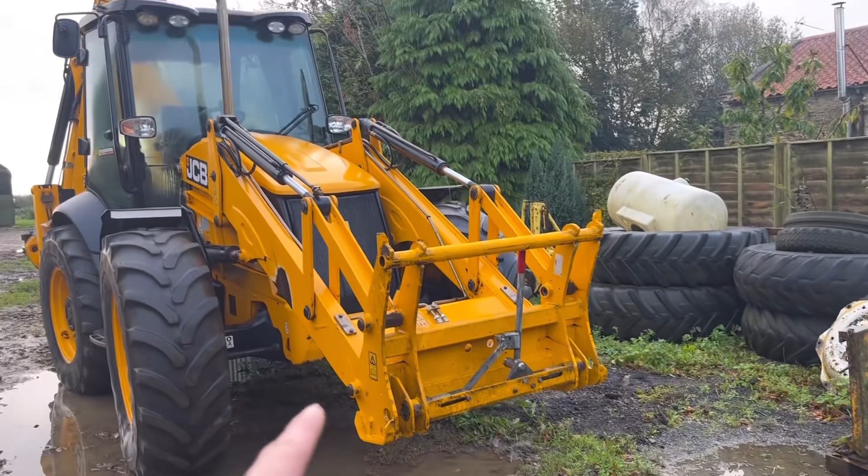So we've got this JCB 4CX in. When this came in, the bucket was fitted straight onto the machine via the pins. The customer's bought a headstock for it, a quick release headstock, so we've changed that over. Now you can change implements on the front, but the bucket obviously won't fit because that was designed to be pinned straight onto the front. So what I've got to do is chop these off, profile some brackets out, and then weld some brackets on so that will fit onto there.

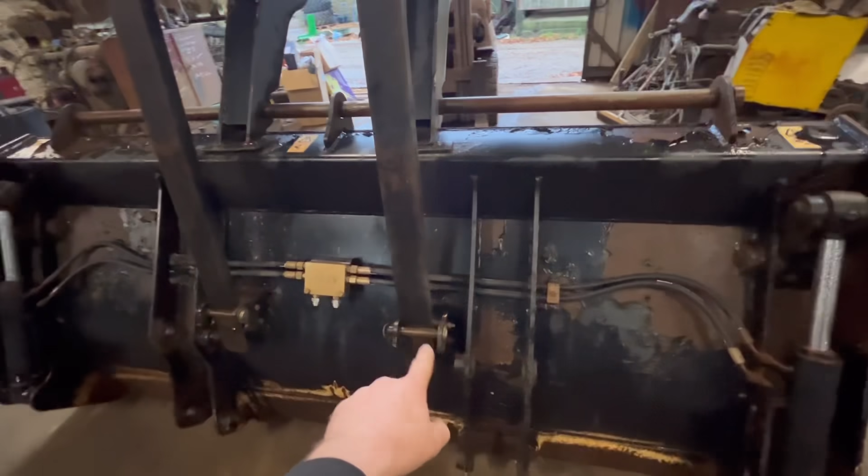I think the first job I'll do is take these tines off completely because I need them like brackets off to be able to get in there. If I fold the tines over and try to move the bucket about, they're going to be flopping about. So if I just take them off completely, there's only a pin to take out, get rid of them, and then there's these pipes to take off, and then I'll blank them off, blank the pipes off and blank the rams off.

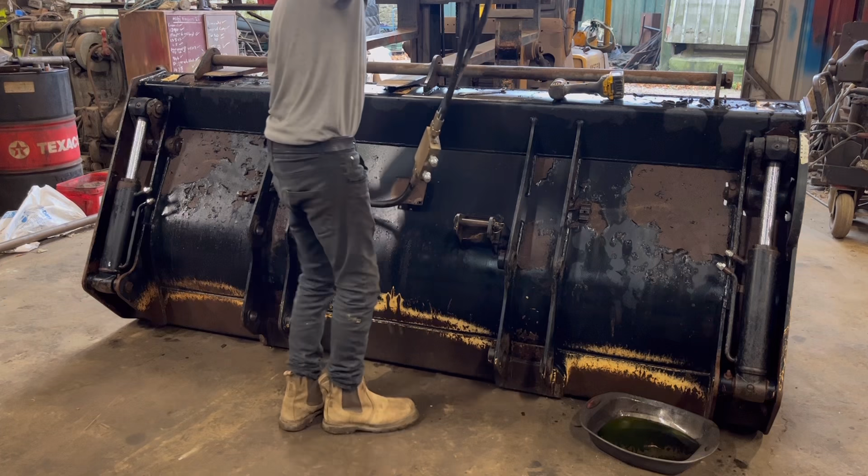So that's both the tines off, taken all the pipework off. I've covered the rams with welding tip dip so that should protect them. I put that bar back in because it's handy to lift it about with. So now I've done all that, I can start chopping one of these off.

I'm just going to take one off to start with, and then I'll work out the geometry for my brackets - work out the curve for the bracket, work out the geometry so that it still has the same amount of tip and crowd as what it did originally. Once I've got that worked out, then I'll cut the other three off.

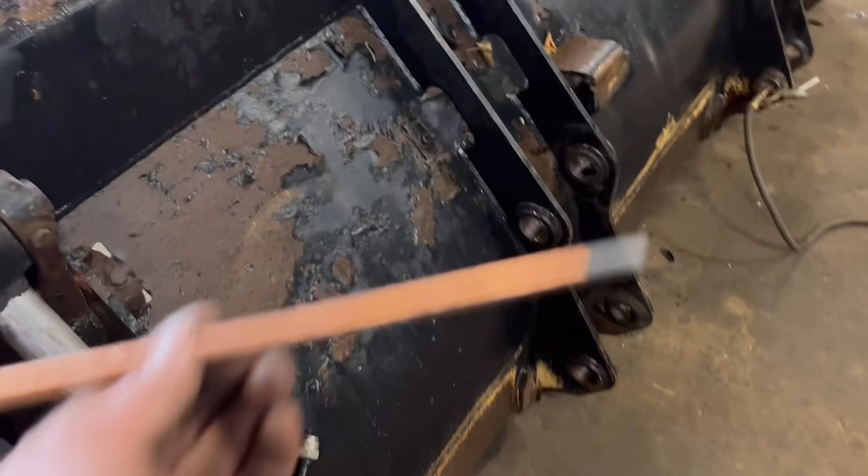So I'm going to gouge down the welds, I think, would be the best way to get them off with the arcair gouger, and we're going to use 8mm rods. I'll try to be as accurate as I can and not dig into the face material, just try to blast the weld away. It is quite a skillful job, arcair gouging. It would be easier to just slice down them with the gas and chop them off, but I never think it looks very good if you leave the remains of old brackets on. I always like to take them off completely, put a new bracket on, so you sort of can't tell it's been done.

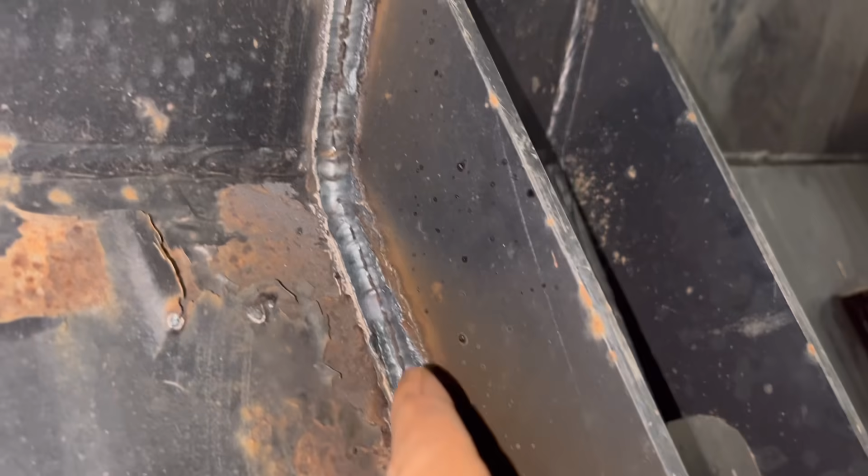Right, so I've gouged down there. You can see the separation line. There's a bit there I've missed. Didn't quite have my eye in to start with, and then when I got down here I sort of got my eye in a bit better.

So hopefully now there's enough weld been melted away, hopefully it'll knock off. There might be a few more bits out. Oh, a bit there I've missed, I've not gone deep enough. I'll give it a smack with the hammer and see what happens.

So that's that off. You can see for the most part I've managed to keep above the base material. Odd spot might have dug in a bit, but it's not too much of a problem. So I'm going to clean that up now, and then I'll use that as a pattern to cut the new bracket out with.

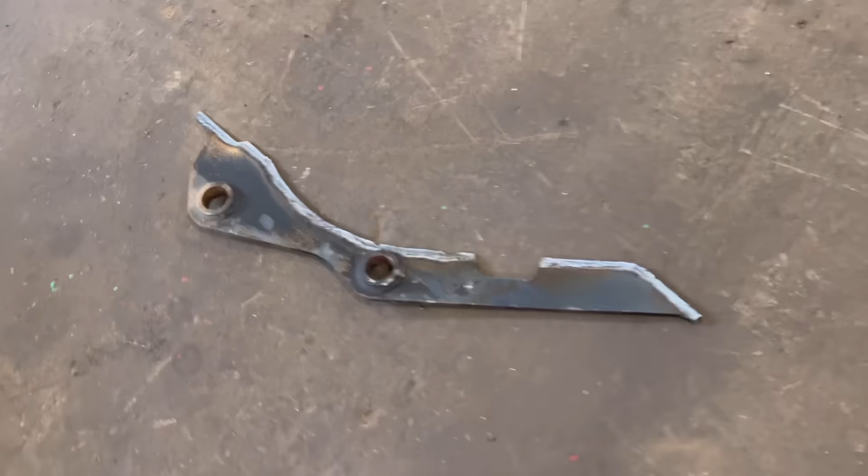Right, so I haven't bothered cleaning that up yet, but what I've done is I've just taken a photo of it, and then I worked out the other day how to import photos into Onshape. So I've put it into Onshape and I've traced around it and then dimensioned it there. So what I'm going to do now is just cut out a bit of 3mm plate - I've got 2mm actually, 2mm plate. Just make sure that is right, and then I can finish drawing the rest of it on once I know that profile of the back of the bucket is right.

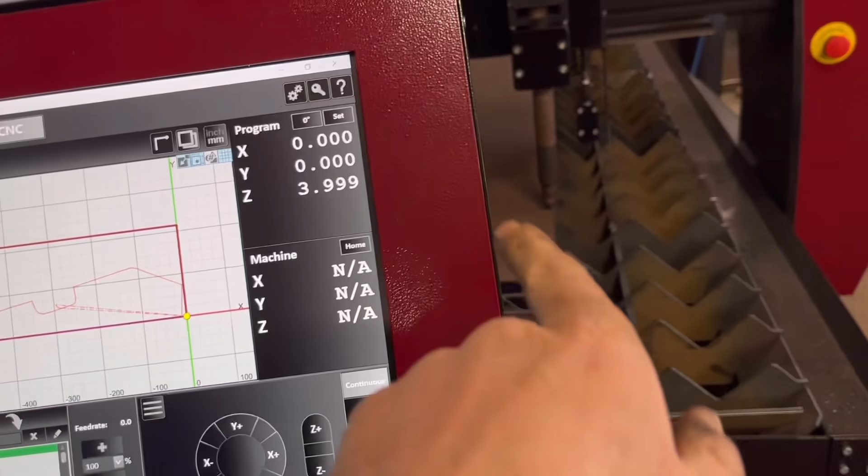Right, so I've got that shape loaded into the CNC program, so that's ready to go, lined up on there. So we'll cut that out now and see where it's going to fit or not.

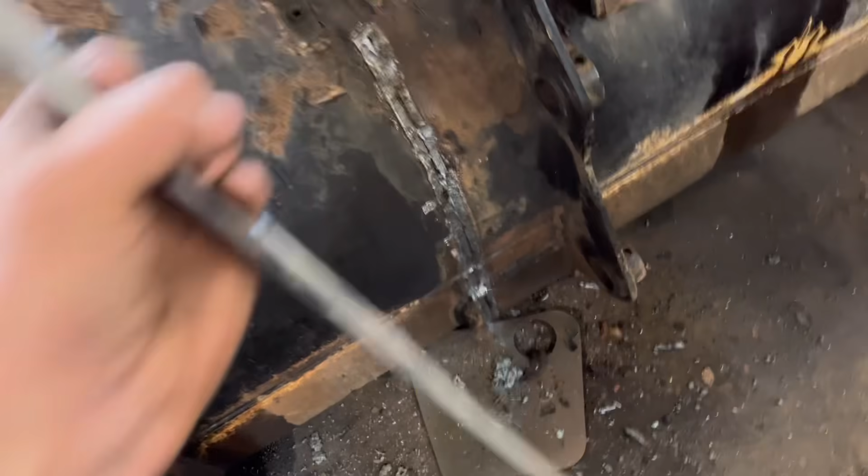And it nearly fits. It's just a bit of a gap around there, you can see. I think it's touching at the top there, so if I grind a bit off that top bit, it should make it fit better around there. Yeah, it fits down there near enough. Just that bit there is a gap.

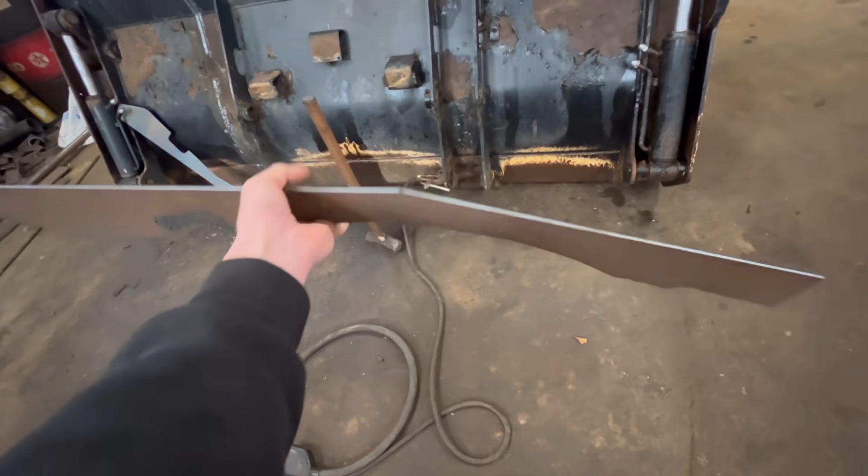Right, so I've cut out another one of them. I did a few alterations. It actually fits one side better than it does the other for some reason. When you put it on this side, it fits nice around there, but then when you put it on here, there's a little bit of a gap in the middle. So I think I'll make that do. That'll do, I can work with that.

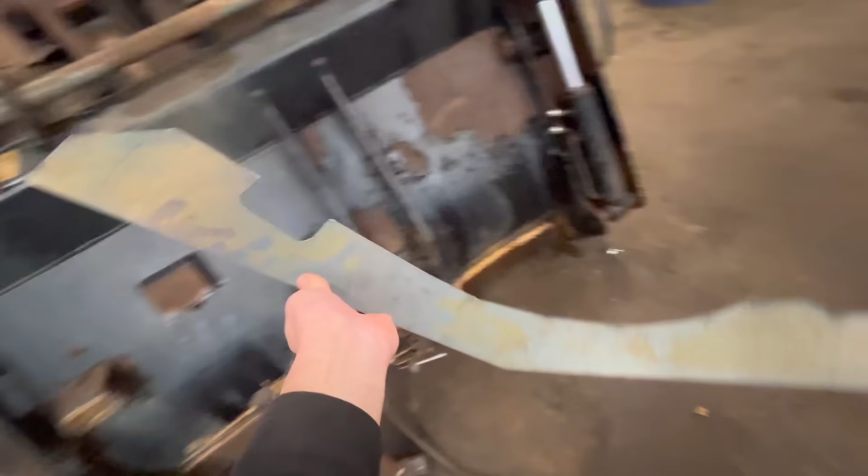So what I need to do now is measure what angle them holes are at now while the bucket's sat on the floor, and set the digger up the same, and then see if there's any difference on the new headstock between where the degree of what the hole centers are.

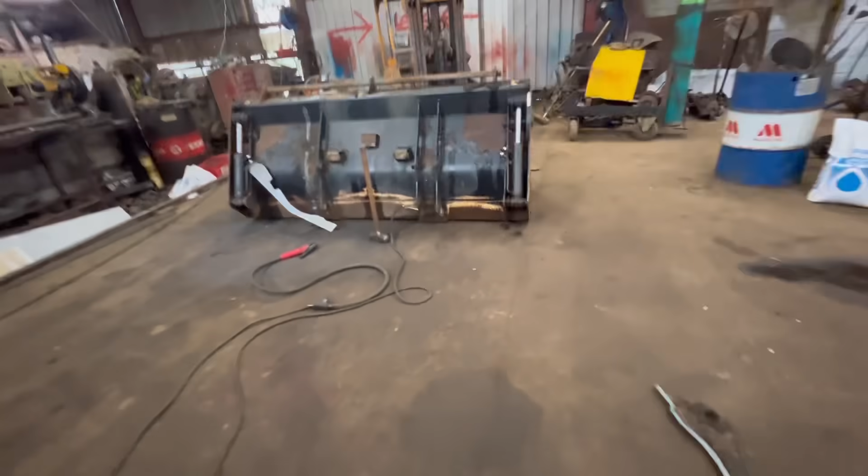What I'll do now is put a straight edge up against the back of them, measure what degrees that is, and then do the same on the digger. Set the pins up at the same degrees as this, and see if the new bottom pin and the top hook is the same. If it's the same, then it'll be straightforward. If it's slightly different, I'll have to put a bit of angle on the brackets, and it's not fussy to a couple of degrees.

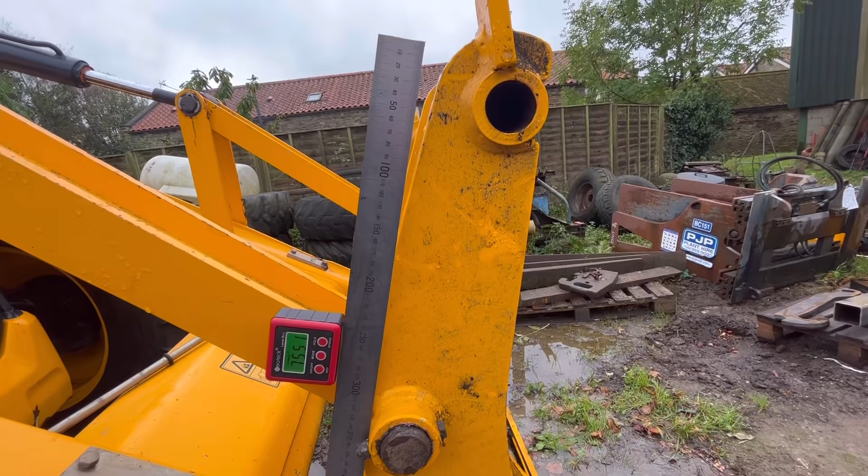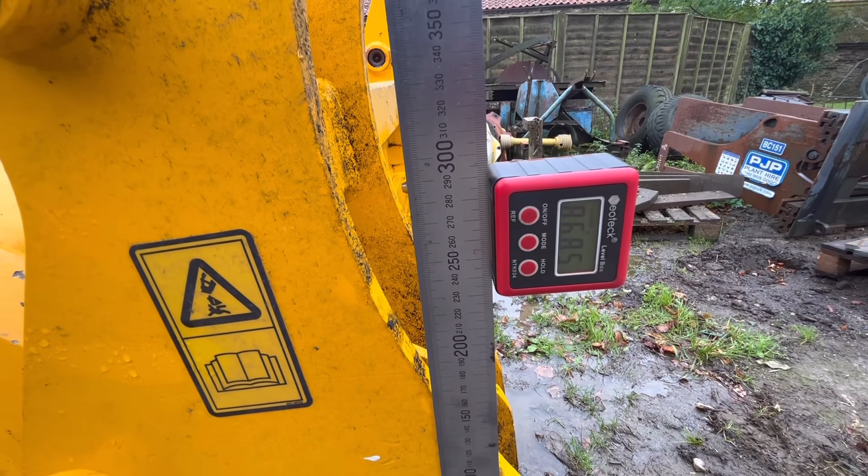You can see that straight edge on there, they are at, we'll call it 76 degrees. So I've got this set up the same, near enough 76 degrees. You can see that top bar and the bottom pin are nearly in line with each other. So when I've got that near enough in the centre of there, and that near enough in the centre of there, that is about 86 degrees. So when I cut my brackets out, when I draw my brackets, they need to be 86 degrees compared to how they are, and then the bucket should have the same geometry.

Right, so there we are. That is what my bracket should look like. I think I am going to just cut one out of 2mm of that plate there again, just to make sure it's right, because 2mm plate is a lot cheaper than 30mm plate.

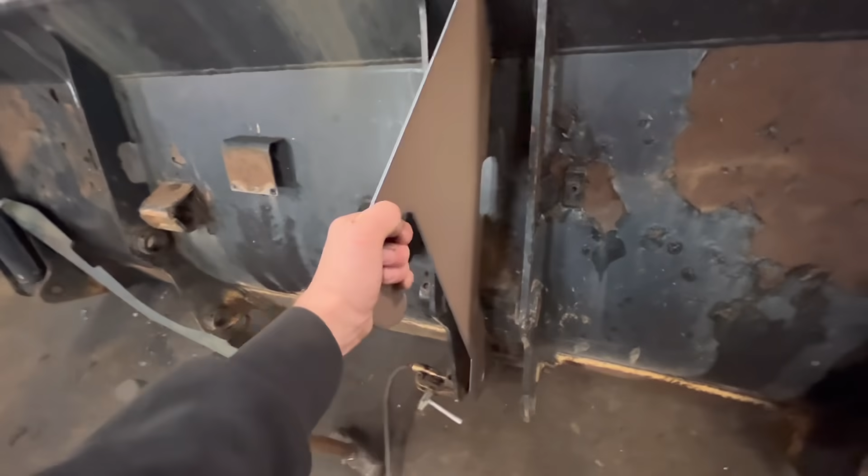So that fits on the back of there, all right. The hole through for the hydraulic pipes. So we'll try it on the machine, make sure the hole centre is right. And if that's right, then we'll finish cutting them off.

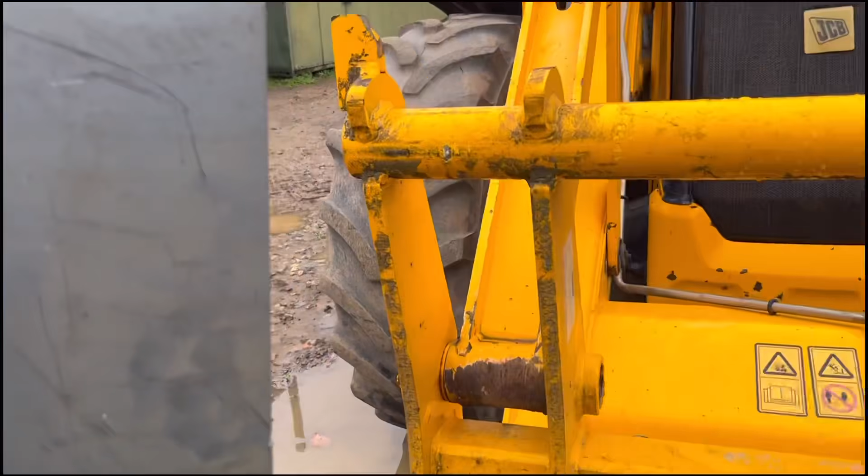Now there will be a stop to weld on here as well. Yeah, that's not right. Oh dear. So I don't know how I've managed to do that, but that is a long way out. So I'll have to check my drawing. It's a good job I did cut it out at 2mm.

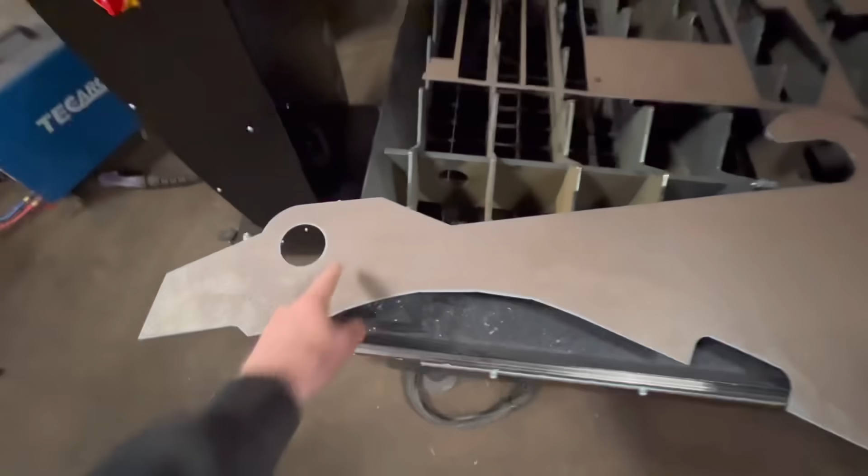That's what I've done wrong now. I did the centre of there to the centre of there at the measurement, rather than it was supposed to be the top of that hole to the centre of there. It's supposed to be 648, and I've done it centres instead, so that's why that doesn't fit.

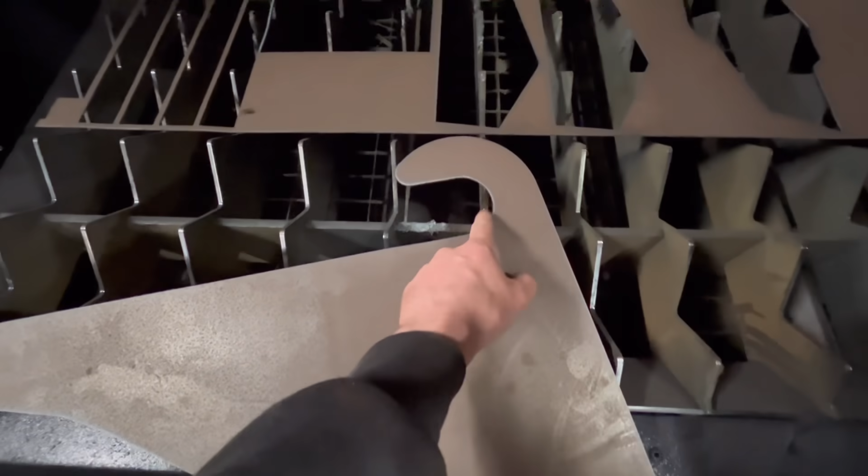I'll just have to go back into my drawing and move this hook down a little bit. I want the bottom hole to stay where it is, same place as where the original bottom bucket pin was. So I've just moved this top hole down 31.5mm, so that should be right again now.

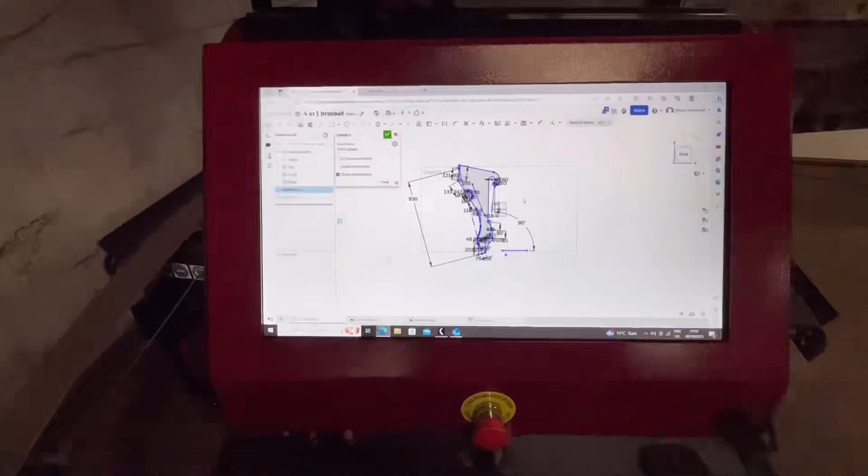So I'm not going to do another test run because the other one fit apart from the hole, so I've altered that and now it should be right. I don't think there's any need to do another trial run. Usually I would have screen recorded what I was doing here, but I'm actually stood at the CNC table now drawing it, so can't screen record what I'm doing. I think I'm happy with that now. That's the first time I've tried doing it off a photograph. It seemed to work alright, apart from a few obvious little mishaps, but yeah, that's right. So we'll gouge the rest of them off now.

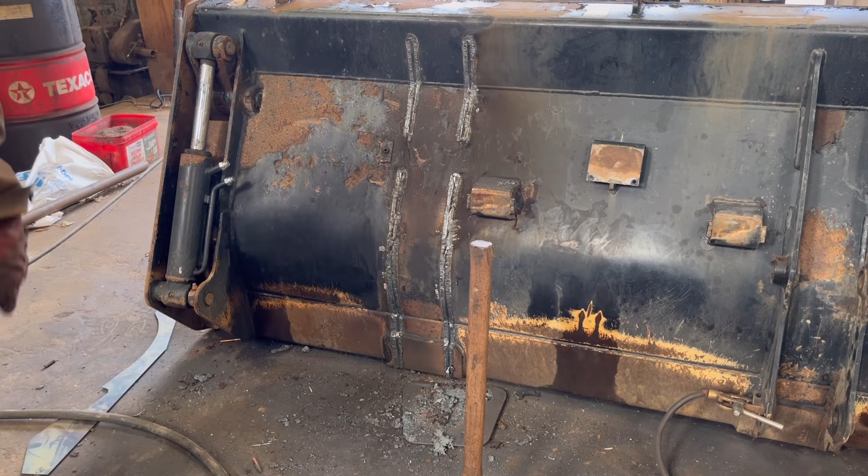That one went quite well. Just starting to get my eye in now, and then I've only got one left to do.

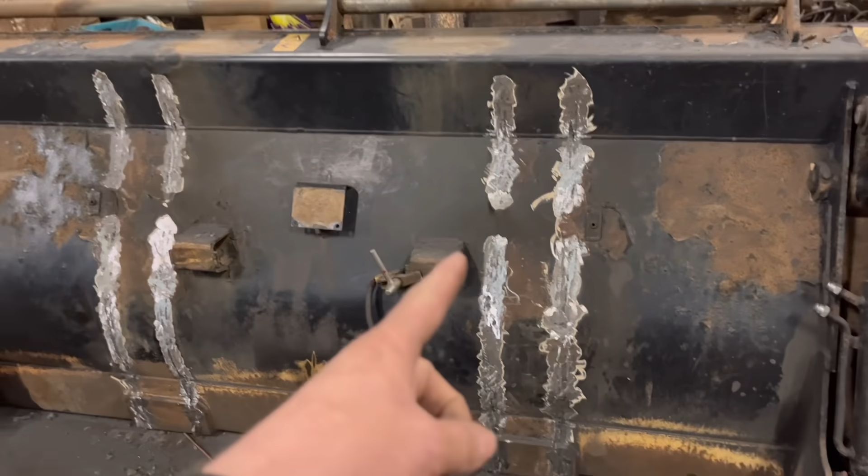Right, so they're all ground down now. There's a few spots where I've dug in, which is annoying, but generally it's not too bad. So I need to bring the plate in now, some 30mm plate, so I can profile the brackets out. But the weather outside sounds horrible, so I'm not looking forward to going out and digging me a bit of plate out.

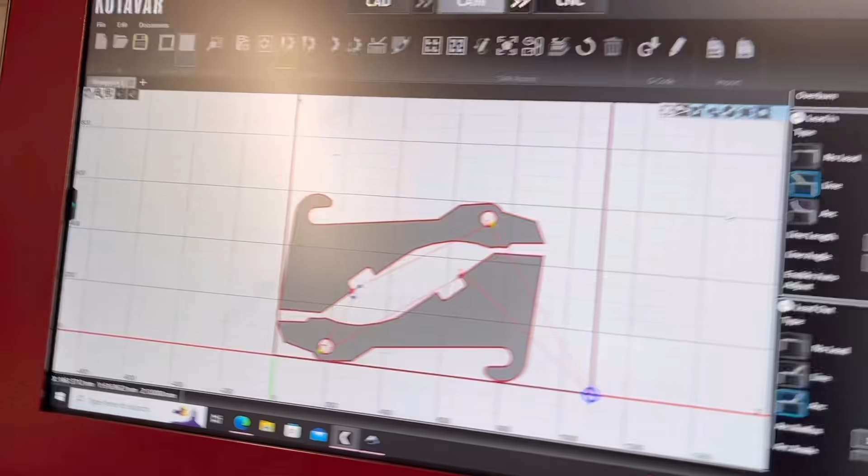Right, so I've got my 30mm plate on there. We're all set up, ready to go I think. I just need to change the plasma torch onto the gas torch. And then I haven't done any gas cutting since when it was getting set up, when the Kutavar engineer was here, so hopefully I can remember how to do it. It's fairly straightforward, you just have to change a few settings onto the torch rather than plasma.

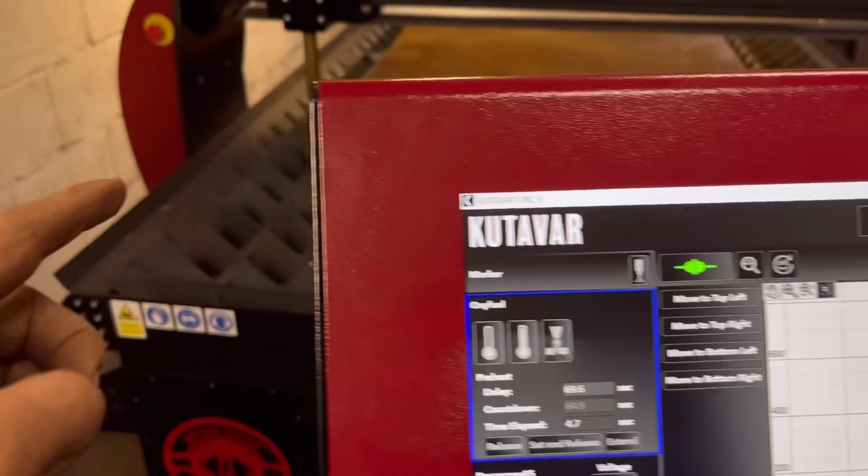Right, so I think we're good to go. I've got it zeroed up to the side of the plate, got the torch swapped over, got this set to oxy fuel. I'll have to fiddle with them. With the plate being cold, they're not preheating it or anything, the delay, you sort of have to do that manually. But yeah, we'll turn gas on and then we'll have a go.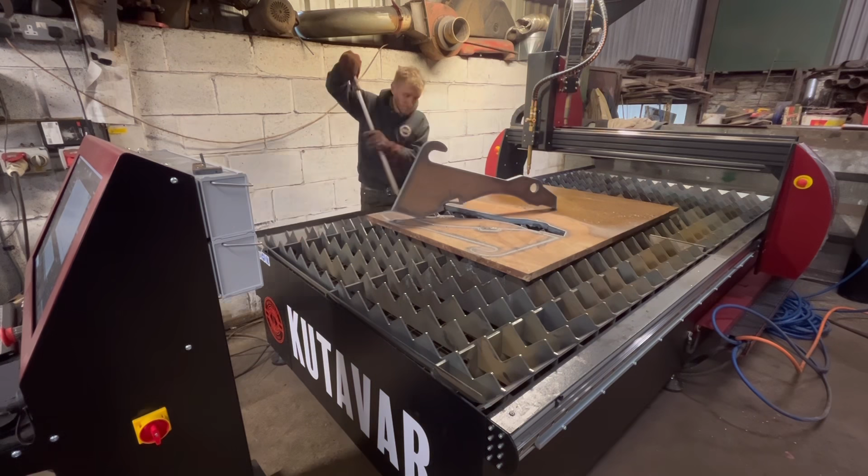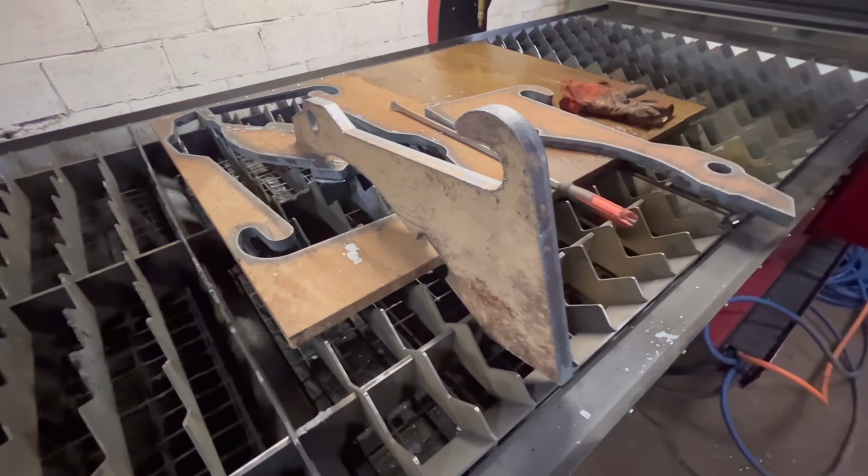So that's them cut out. Pretty decent cut quality on there. Maybe a bit of fine tuning needed, but no, happy with that. So I have to wait for them to cool down and then give them a clean up and maybe try one on as well. Right, so that bracket fits on there, spot on. Only thing it does need is a stop welding on here, otherwise the bracket goes past the pinhole, so they have to have a stop welded on to put up against there. So I can mount that on, and then that's them done.

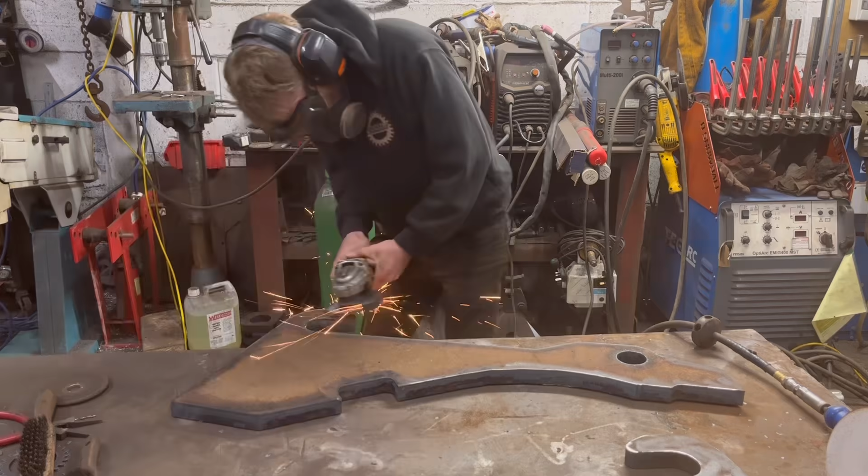Right, so I've got these brackets cleaned up, but I think I'm going to weld them on the bucket first and then make the stops, because if I put a stop on there now, like it needs to be on there, but if I weld something on now, it's going to get in the way of me welding it on the bucket. So I could use like a 30mm block, but then there's going to be a gap that's not big enough to get in to weld onto there, and too big to weld it to the bucket. So yeah, I'll weld these on the bucket first and then I'll make the stop afterwards.

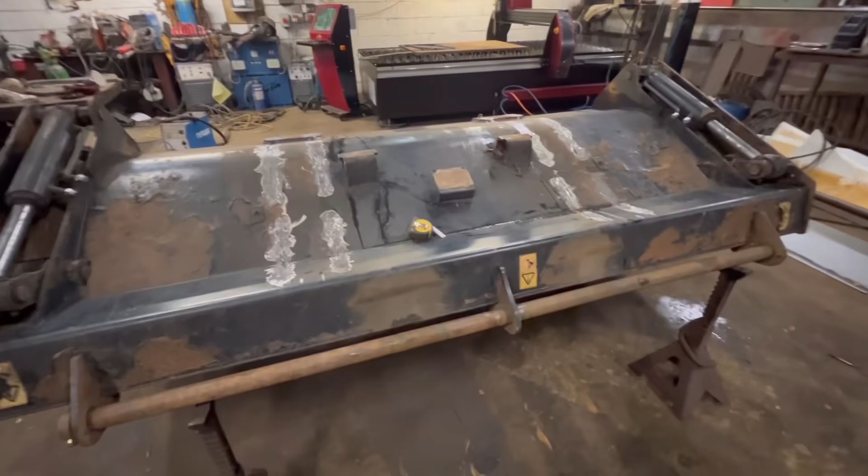So these brackets want to be on here at 1 metre centres, so now I'm going to have to grind a clean strip in between there for the brackets to go on. And while I'm doing that, I'll probably fill in some of these little bits just to make it look a bit better, fill in with weld and grind them flat. Then we can stick the brackets on, get them squared up and tacked on.

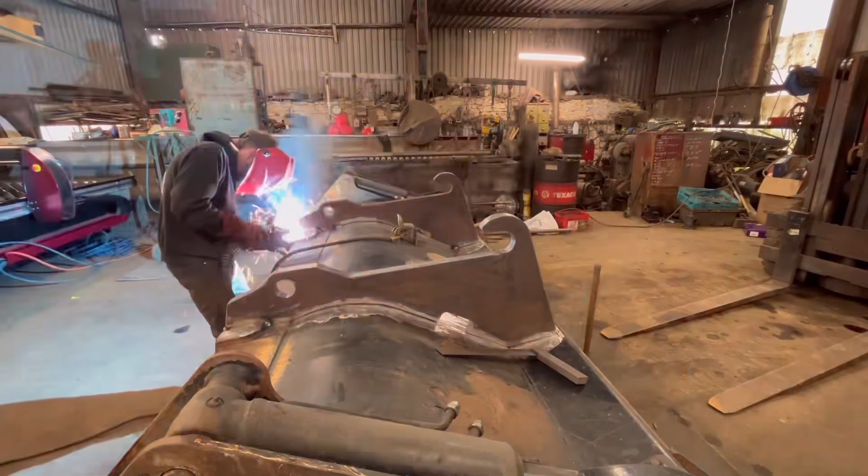Right, so that's them tacked on, so they're ready to weld on now. There's a little bit of a gap under there, but that's no problem.

So what I'll do is weld from there down to there in this position, and then it's a bit steep to weld up, so I'll do that first, then level it out so it's level, and then weld that up. I'll weld that bit up as it is now as well, then from there.

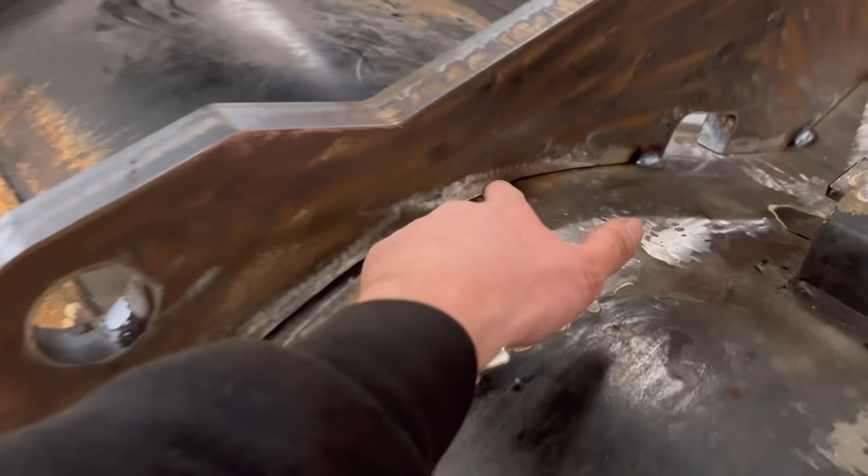Now ideally, with them being 30mm, you'd probably want to preheat them, but I'm not going to bother. Where we used to work, we used to make buckets, and we never preheated any of the brackets there, and we never had any bother with them cracking or breaking off or anything. Plus the machine this has come off has done 9,500 hours, and you can see the bucket has hardly been used, and it's going to be used even less now, so that's why I'm not going to preheat the brackets. I'll probably just put a bit of a filler weld in there first to fill that gap up a bit, and then run a bigger weld over the top of it.

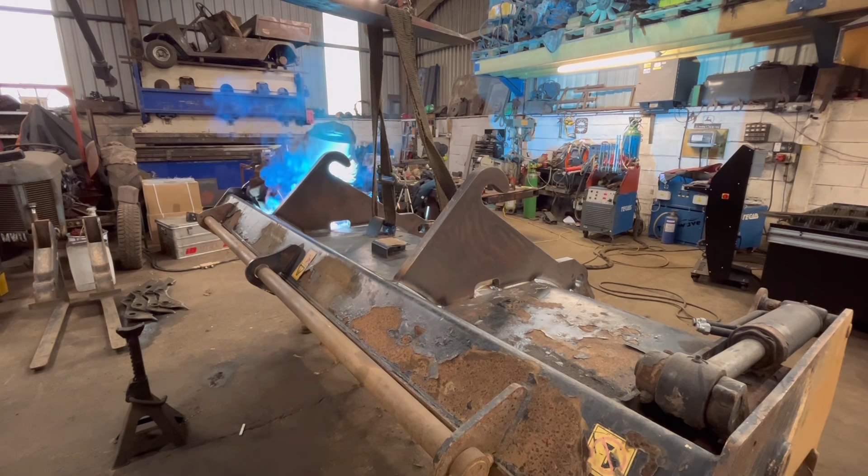So that's them all welded on now.

Some more bloody suicidal flies. You don't really notice them, and then when you look up at the roof lights, you can see them all flying around.

Oh yeah, that's them on.

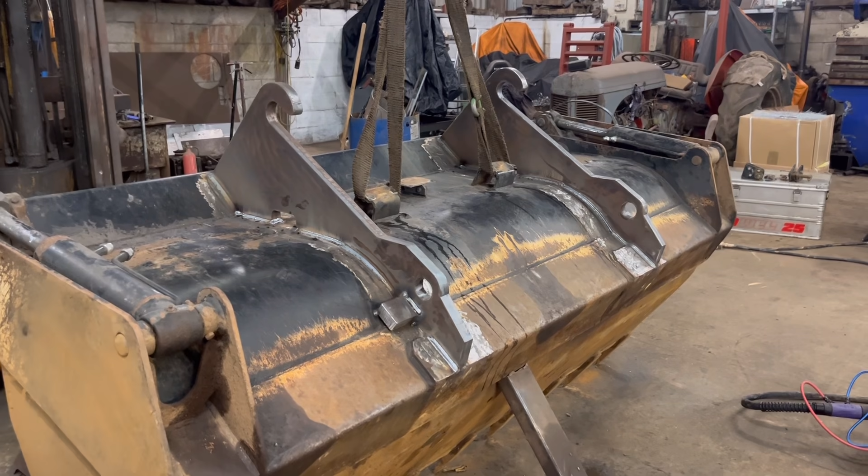So I'll probably just offer it up onto the machine now, double check that it fits. It's a bit late really, they're all welded on, but just check it fits before I paint it, and then I can paint it and put the pipes back on.

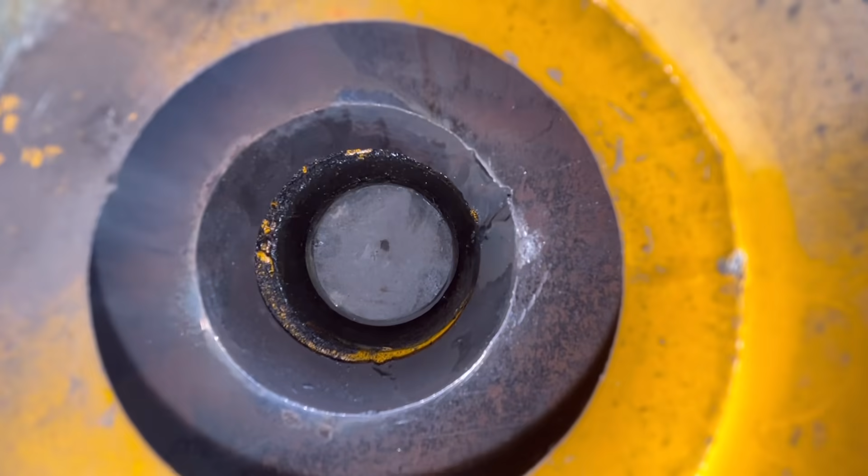Yeah, just a little bit tight. That one comes nearly all the way through. Yeah, just that one, a little bit tight. That's not a problem.

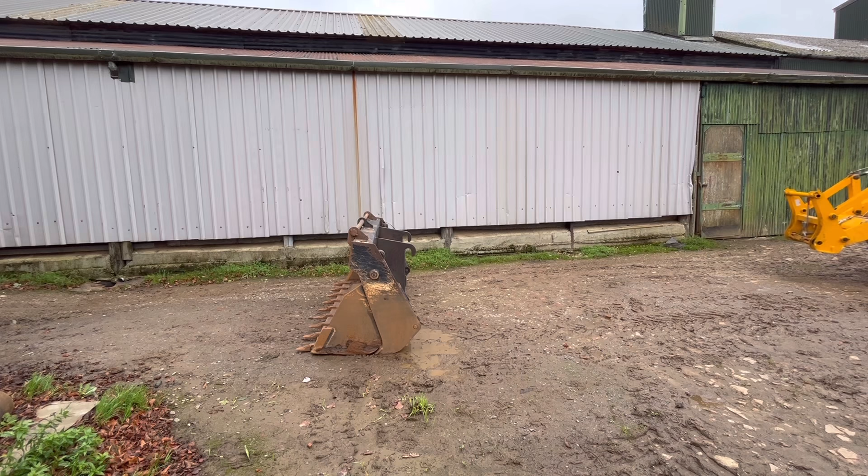So I don't think there's much point putting any effort into the paint job when you look at the rest of it, so I'm just going to do a rattle can.

I've got a chicken in the workshop. What are you doing?

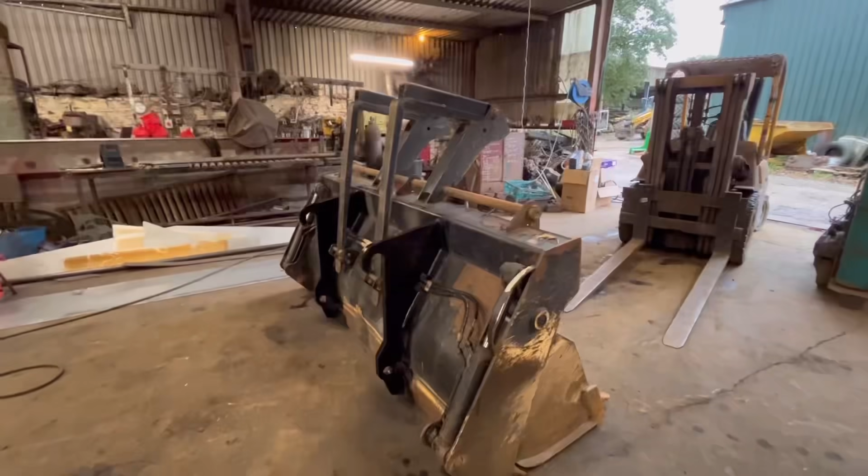Right, that's it, back together. Pipes are back on, tines are back on. But they're awkward of them, I bet some people have trapped or lost some fingers folding them in and out. The only thing now with it being on brackets is when these swing over, they'll hit the bar, so you'll have to unhitch the bucket before you can unfold the tines. But now it's like a quick hitch, it doesn't really matter. Probably easier taking the bucket off to fold them over anyway. So that is that job done now.

I do have a few other attachments to alter to fit the same digger. I'm not sure whether I'm going to video them or not. So I'll take this out now and put it back on the digger again.

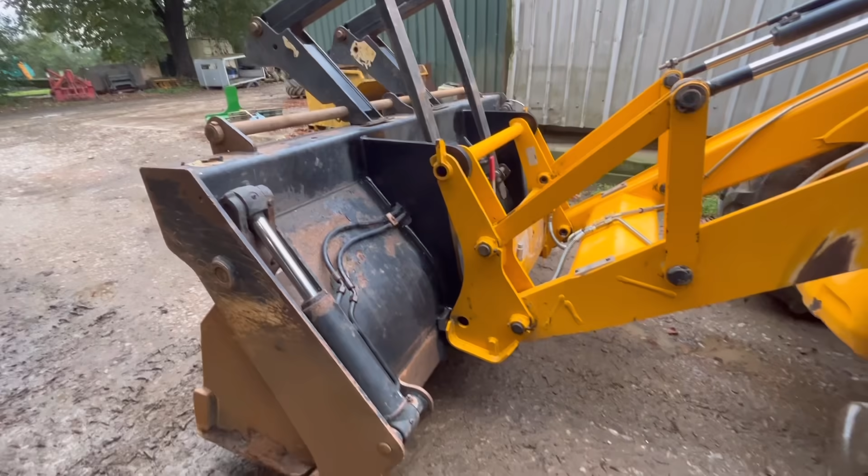Right, it's back on there now. You definitely will have to take the bucket off before you can fold the tines over, because they'll catch that. But locking pins lock all the way in properly now, so that's good.

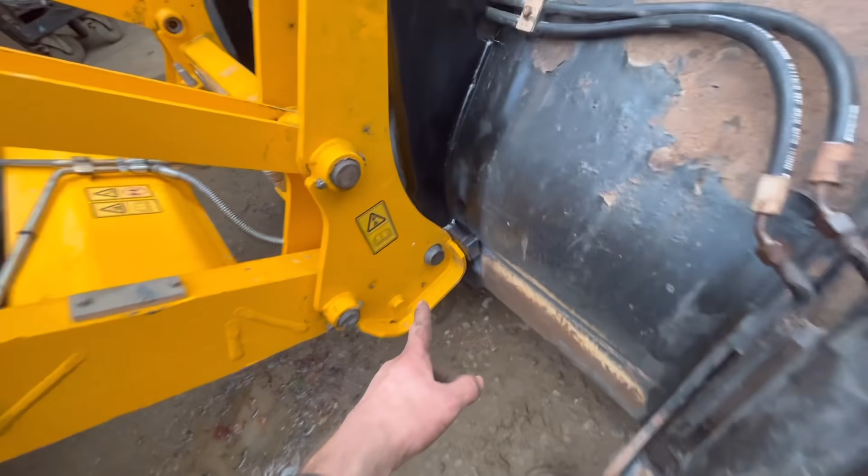So that is that job done. You can see them carriages right up against them stops, that's good. That pin comes through further than the other one for some reason, but I've tried it with the bucket off and it's still the same. That pin doesn't come through as far, but that is right at the end of its travel, because I've tried it with the bucket not on, so that's all alright.

So that's all for this video. Hope you've enjoyed watching.